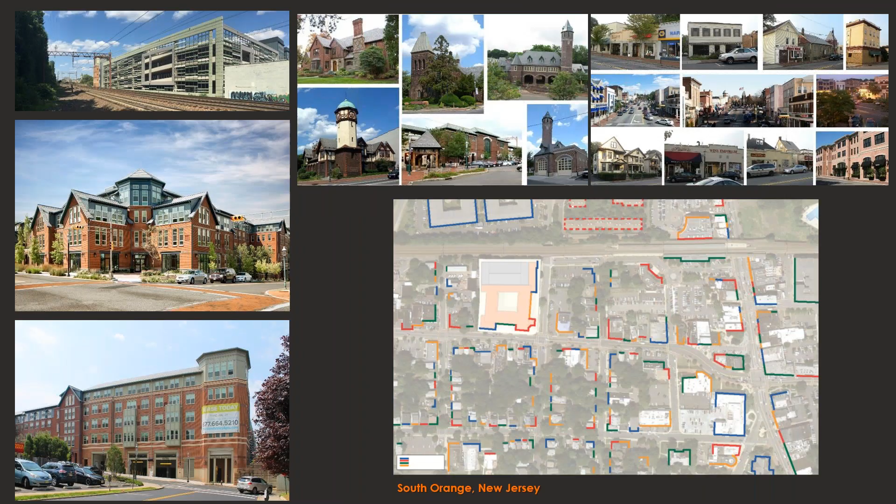When we do our design projects, particularly in existing communities, and definitely ones related to transit, we often take a moment and try to map out those increments on the plan of the community. The diagram in the lower right is a graphic map overlaid on a satellite photo of the facade increments—the sizes and scales of buildings as they're expressed as uniform architecture. So some are larger and some are smaller.

As we were looking at incorporating our project, which was generally much larger than the predominant scale of the increment, we saw that in order to get it to fit better into the community, we wanted to create scaling devices and facade identities that were smaller. The image in the middle reflects that approach, related to smaller identities across the street. Then as it segued down the hill towards the train station, it moved towards a larger building identity that related to some of the larger identities you can see in the upper right.

The civic buildings are in the middle of the page, and the upper right shows the private sector identities. We looked at the character of the community—what the size, shape, and predominant form and mass is—and then how our project could relate to that.

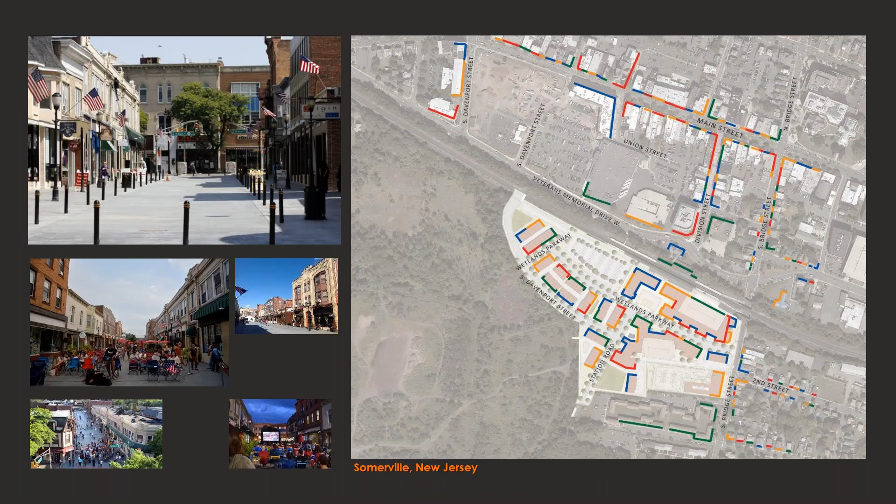Another New Jersey community we're working in right now is Somerville. Again, when we look at this project, which is replacing an old rail yard and town dump on the other side of the tracks from their existing main street—which has a lot of charm and character, as you can see in the images on the left—we looked at the height, scale, and general run of facades as they march along the streets we would be connecting to with our project.

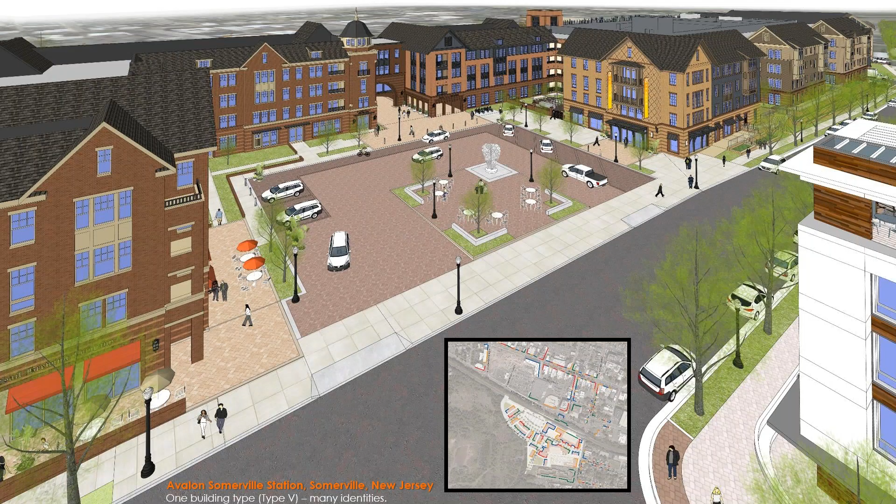Also, because this particular project had so much that it was defining on its own, we thought about coming up with an architecture appropriate to relate both to the character of their community, but also to historic trends with transit-oriented development, and nods to architectural experiences that have happened since the predominant building types and styles in Somerville were made.

So this is the place that we arrived at, currently being bid. There's the transit plaza, the drop-off plaza with some retail, the meeting hall for the jurisdiction, and lobbies for the residential components. There's a modern identity off on the far right, but generally they're more traditional transit lifestyle-oriented facades, which was part of what this jurisdiction was looking for when they were approving the project.

But again, you can see the scale, you can see the increment that we've kept up. This is one step up, a little bit larger than the increment on the other side of the tracks on Main Street, but it is scaled to itself, and it does segue to the identities along Bridge Street here and other parts of the community as it moves down the street.

Brian, before you move on to the next slide, could you go back? Sure. I normally don't interrupt with questions until the end, but there are 7 or 8 folks that want to know what the color coding means in the black box, what all of that represents.

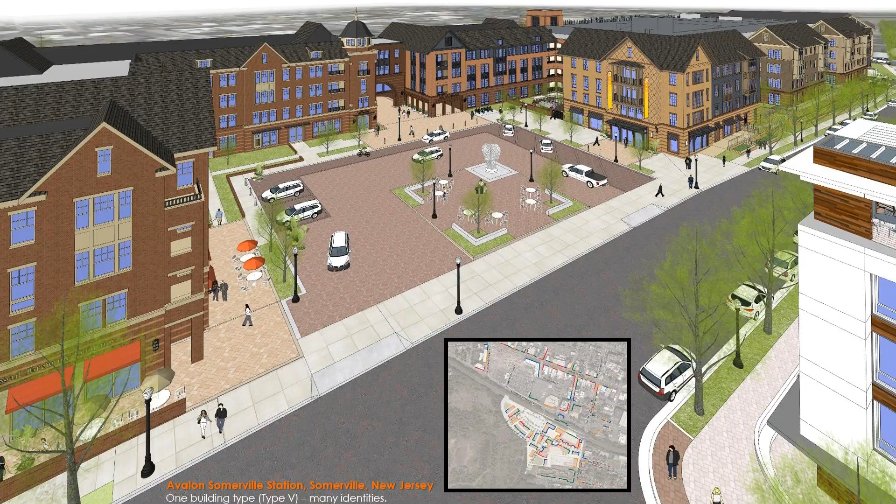Thank you. Sure. So that was a good moment to have a question, because now I want to talk a little bit about what is community in a post-COVID-19 world.

And as part of our worldview, we do a lot of mixed use projects with intensive retail. I'm going to show a few examples now, particularly from our work with Steiner Associates, Yaromir Steiner. He, long before we got to where we are now, started talking about retail as two different models of retail in the US.

There are retail places that are need-based—the supermarket, Costco, Walmart, those kinds of places you go that are commodity oriented. You typically are shopping by carts. And then there are places that are want based. They're slower, they're pedestrian oriented, they're about engaging, and you walk around, and part of the experience is surprise and what's new and what's out there, and exploration and discovery. One is about getting your needs met right away and getting in and out. The other is about being part of a community and lingering.

And for the needs-based model retail, I think the change that was already happening has been accelerated in the COVID world. We've all learned how to use Instacart and get Amazon deliveries and get food brought to our homes, and I don't think that's going to change. I think, in fact, many I've talked to are going to have a Costco experience, but through Instacart.

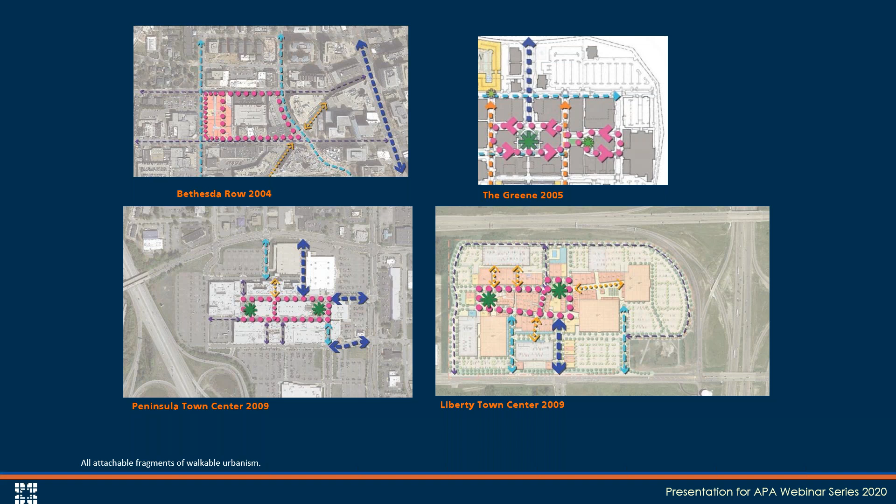destinations along a generally contained place. The figure 8 is a diagram that's used a lot, but it's not always the case—it's an example in these four here. The idea with these kinds of retail centers is that they do attach outward and extend, allowing for growth and augmentation as time moves forward.

This comes from looking at charming historic communities, and in the case of this project, just outside of Dayton, it really had to do with looking at what is appropriate, comfortable, and relevant for folks in this area. One thing we do often, particularly when doing historical research, is looking at the

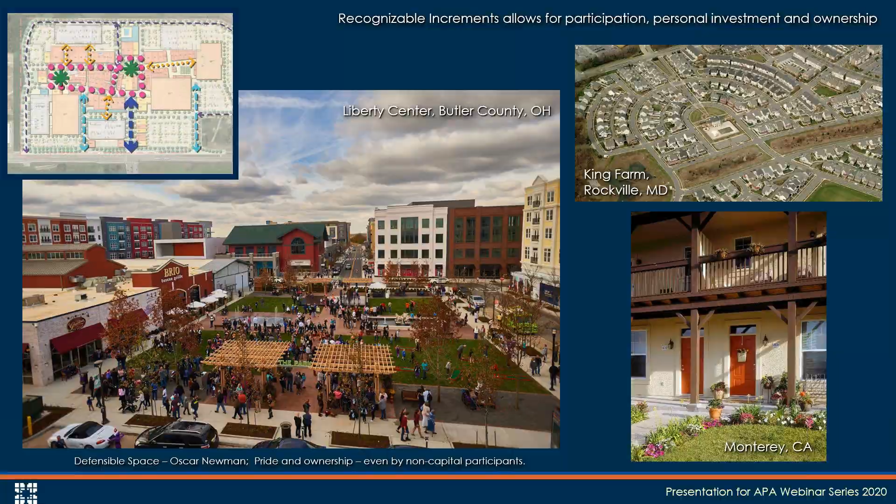Part of the book was, while there's lots of great aspects to those neighborhoods we showed at the beginning, we focused on what increments made a great walkable neighborhood—what you can add to that attachable fragment to make a neighborhood better and better. What can you grow? What do you grow with? We broke the book down into seven or eight categories of products. They're not all buildings, so I can't call them building types, because there are things in there that aren't buildings.

But we started with private sector buildings, and then we were asked by a publisher to add the public buildings. And then what turned out to be the most controversial, we added mobility types to the book as well. I'll talk about that in a little bit.

But all of these types are what make a great walkable environment work, and they all have influence on one another. Imagine a chessboard and the way the queen and the pawn and the knight influence how all the others are located. That's how we're looking at how each of these buildings have an inflection on the greater whole.

Buildings, which are really private sector driven, have an inflection onto the greater whole. And so part of what we did was talk about building type in terms of the community level, and therefore we talk about the term of increment for that.

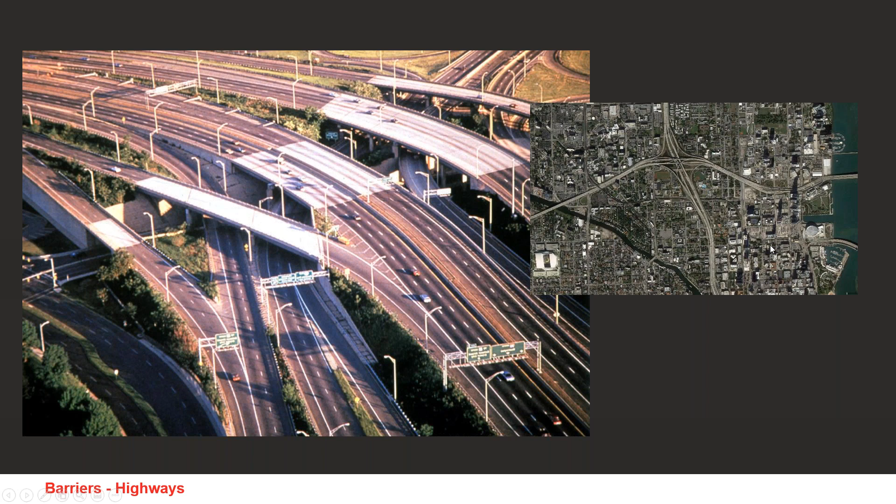So let's talk a little bit about what's a barrier to community. Obviously, highways and rail lines even will stop a great community from growing and one neighborhood from extending. It's an obvious barrier. This is a notorious example from Miami on the right with I-95.

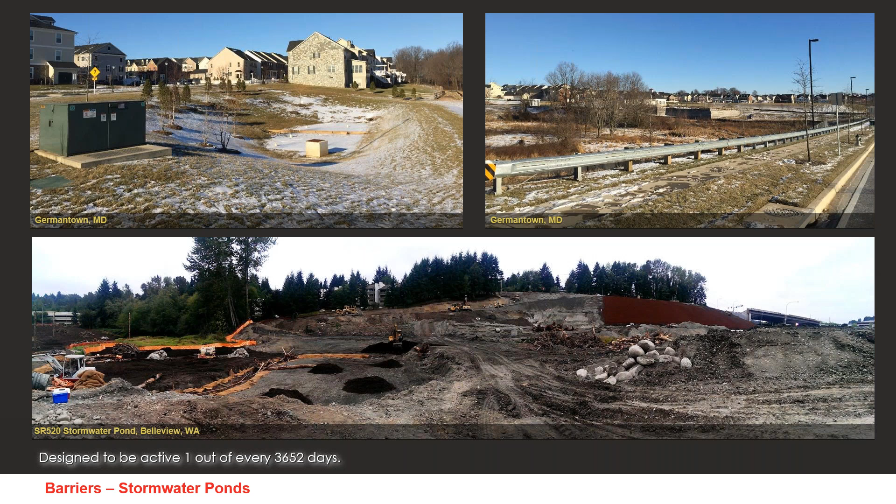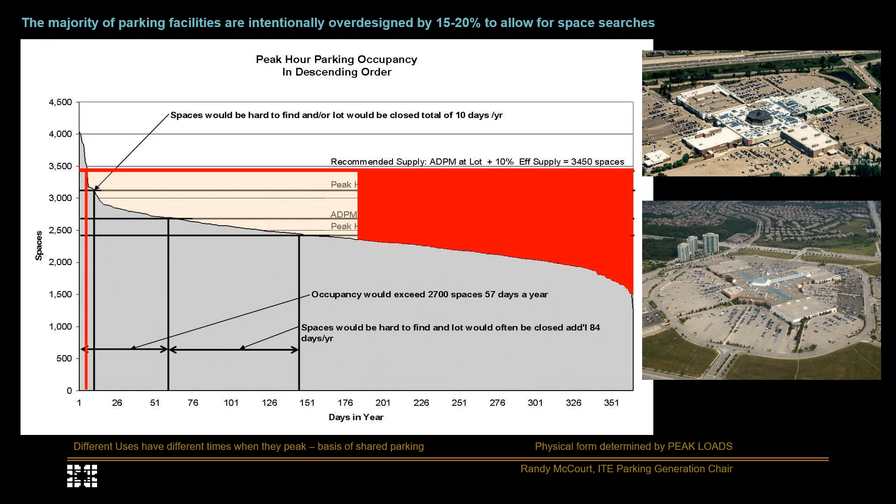Similarly, parking is a storage use. In the building code, it's very clearly called out as a storage use. And like stormwater, it's designed for peak usage at one part of the year. So regional shopping malls are designed using numbers in the codes from the second Saturday before Christmas or the Saturday after Thanksgiving. Those numbers are used to design the overall facility with 15% overage - you take what they think occupancy is going to be and add 15% so people can circulate. So you're automatically starting with 15% empty. But when you go to June or July, that parking lot is 45% to 50% empty by design. That's how they're made - we're designing the emptiness into the project through the engineering of it.

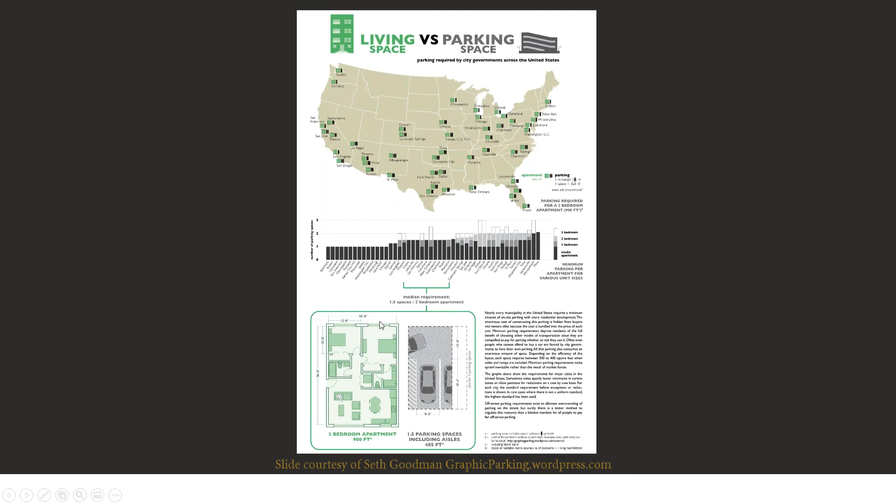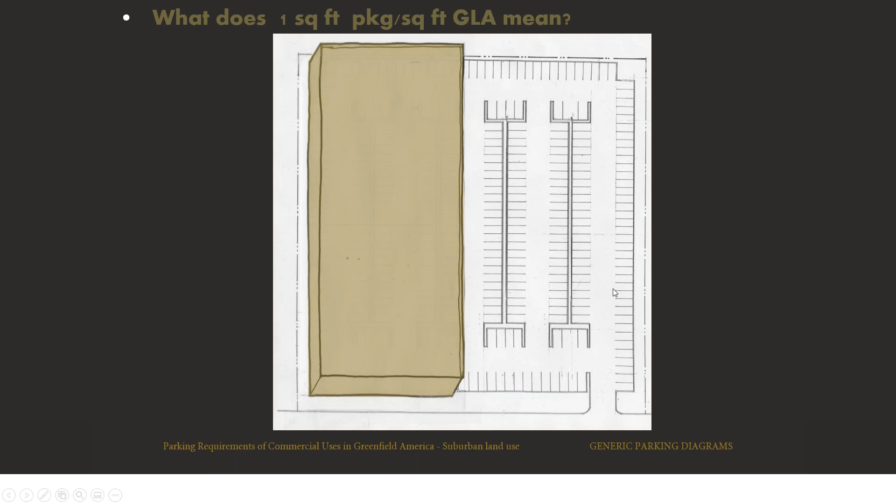So what does that mean? That means if you're doing a 1-story building, half your land has to be 1-story commercial building, half your land has to be parking. If you're doing a 2-story building, more of your land has to be parking. If you do a 4-story building, the majority of your land has to be parking by law, by rule, right? And so that's why the suburbs look like they do, no surprise.

This is like putting stuff from your closets in your living room. And when you do that, you're called a hoarder. And that's what our planning does. You're effectively taking storage and putting it in your front. And this has other negative consequences.

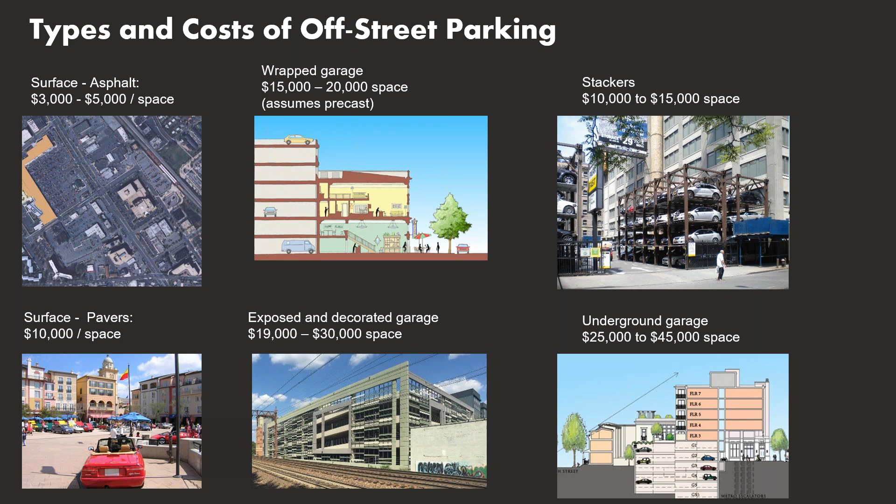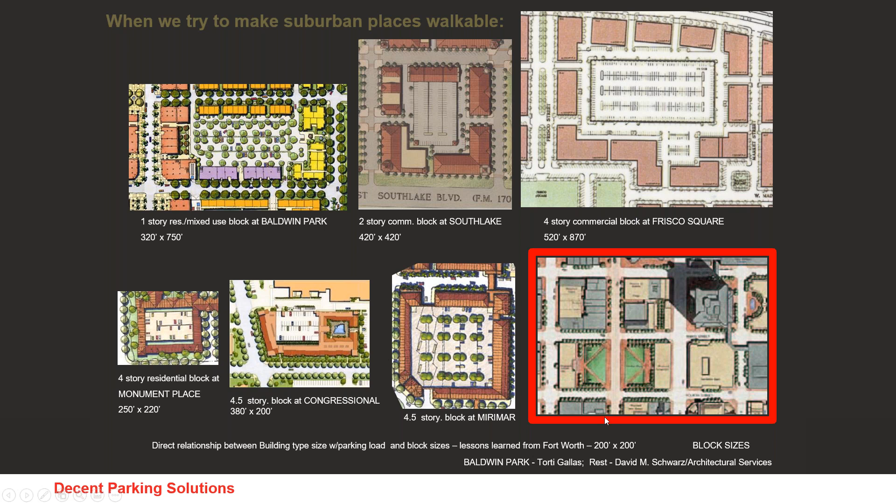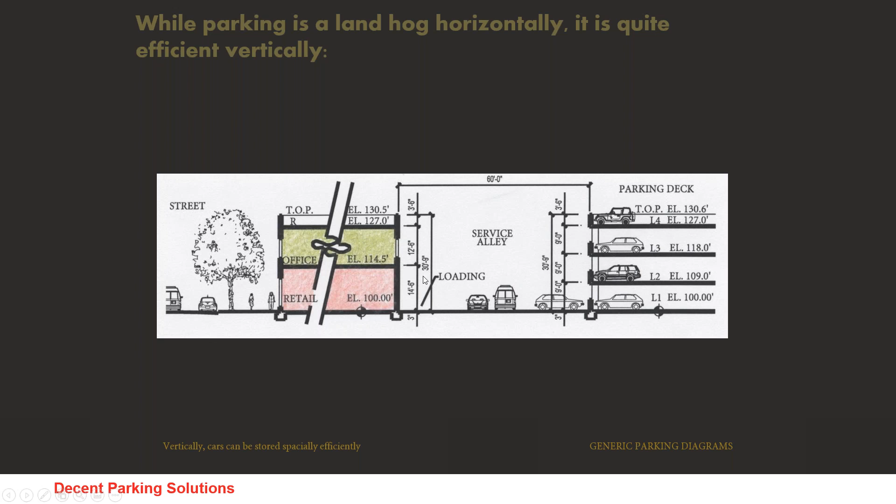So parking is inefficient horizontally, but it is more efficient vertically. This is a diagram from Southlake that shows that in the same height of a 2-story commercial building, you can get 4 levels of parking, and that's how those blocks work.

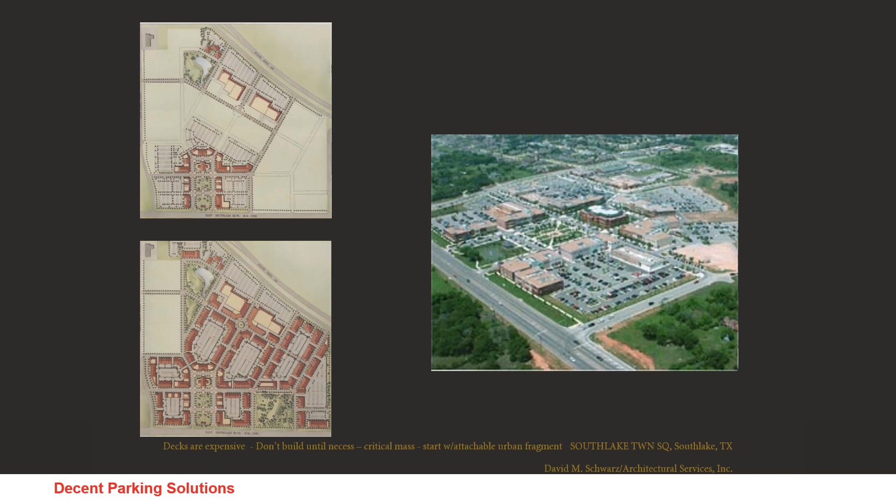Parking standards - one more quick couple comments on parking standards. And housing in particular: the cost of a bath in a unit of multifamily is somewhere around $7,000. The cost of a kitchen is anywhere from $12,000 to $17,000 to get that built and installed - you can probably get it built cheaper, right? So those are typically the most expensive parts of a unit outside of the drywall and the wood studs.

In some jurisdictions you work in, they require 2 spaces, and sometimes that has to be underground. So you're requiring $50,000 to $110,000 worth of parking to support a unit where you could theoretically build it for a lot less - it doubles the cost of the housing because of something not intrinsic to the unit itself, but the mobility solution that's been privatized and added to that unit.

And so privatized parking also has a double whammy on the private sector, in that it hurts the yield of the land.

This is 3 building examples, all Type 5A maxed out buildings - meaning they're maxed out 4-story tall wood buildings on their site. When you max out that and you're surface parked, you can only get 30 units an acre.

When you max out a Type 5 building and you've got a parking deck in it, in a wrap, you can get 55 units an acre. When you max it out and you're transit served with bikes and other mobility solutions, you can get up to 80 units an acre yield on that with that type.

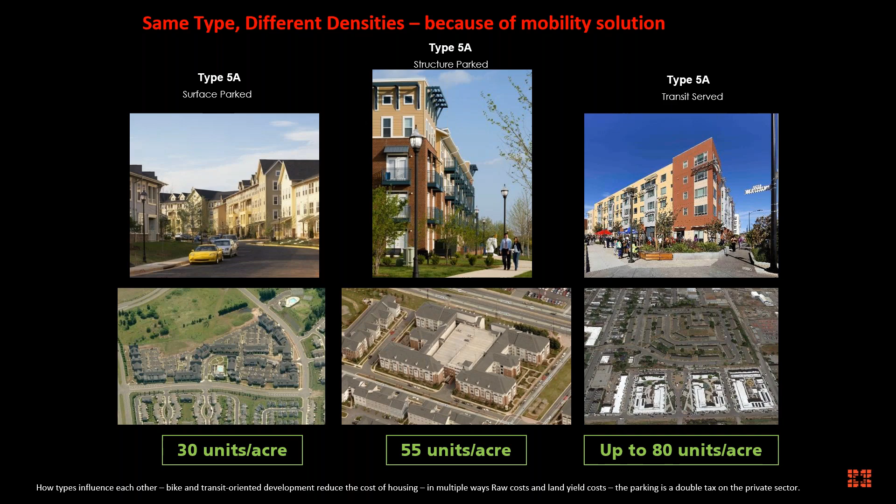So the privatization of mobility impacts both the cost of the unit per unit, because you've got to build that mobility solution, but it also impacts how much yield the land can get at a particular building type. All right, so we'll go to building types now.

These are lower scale single family types that all create community. There's the basics like side stairs and center stair colonials and Cape Cods, but there are also some interesting types developed in more walkable places, like the Coach House, which has tuck under parking, Katrina cottages and such. Most of these types, which we're trying to make great frontages, often have their alley service on the rear, as the middle image shows.

Townhouse types are interesting in that there's a lot of variety that isn't necessarily understood by the planning community. The difference between a 16-foot townhouse and a 20 and 25-foot townhouse is huge from the perspective of the person who's living in it and the developer.

Even the difference between an 18 and 20 is there's a lot that can be achieved in a 20 that can't be done in an 18. For example, in a 20, you can put 2 bedrooms side by side on a typical floor, which is not feasible in an 18-foot unit. In an 18-foot unit, you can park 2 cars side by side in the back, which you cannot do in a 16-foot unit.

In a 16-foot unit, you can park 1 car in back and 1 car in front parallel, which is not really doable with a 14-foot unit. So these are all things, and then you can go up the spectrum and there's more capabilities. Typically, you can start to wrap a stair in a wider unit like a 25 as you go up.

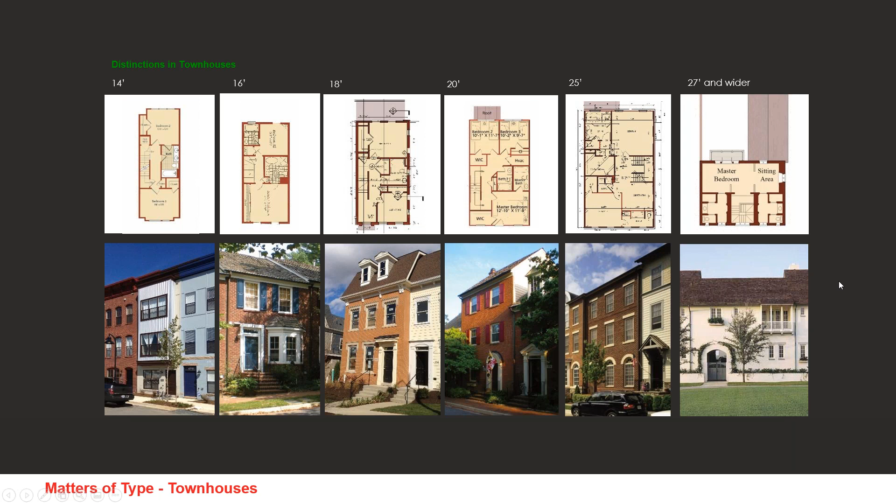There are other interesting kinds of attached housing. This is an example from Adelaide and a project called Lightsview that's very interesting. These are single-story row houses. Typically this isn't done because of land costs, developers want to get more out of their land, so they'll build multi-stories to get more stuff and develop more. But in this case, the developer devised this type and it was successful.

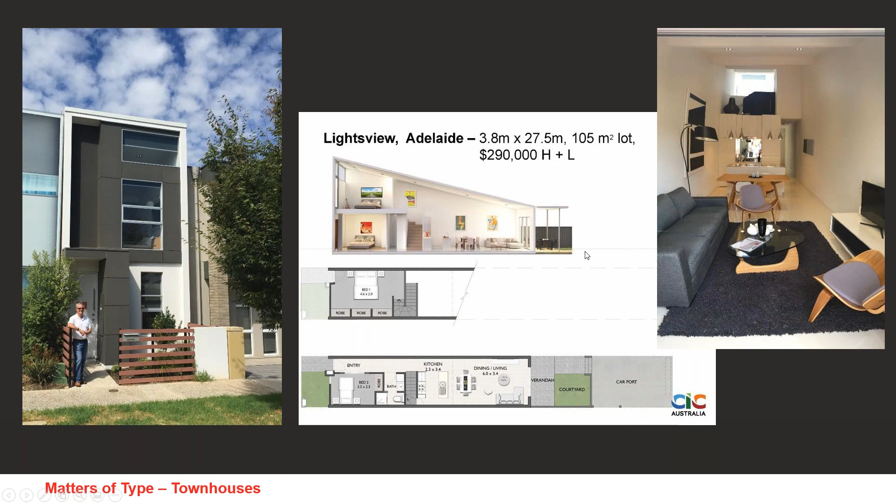They also, at the same project, devised these really interesting 12-foot wide units that had a very distinct market for recent divorcees with kids, where there was a den room in the lower level that could double as a bedroom when the kid visits, but there's a main bedroom above and then a sitting area behind, and these were very successful units for them.

There are other kinds of units that others have called missing middle. I'll breeze through these, but these next couple are self-parking types. That is, they're like townhouses in that there's multiple units, but they all park themselves, so you don't have to worry about finding parking for them.

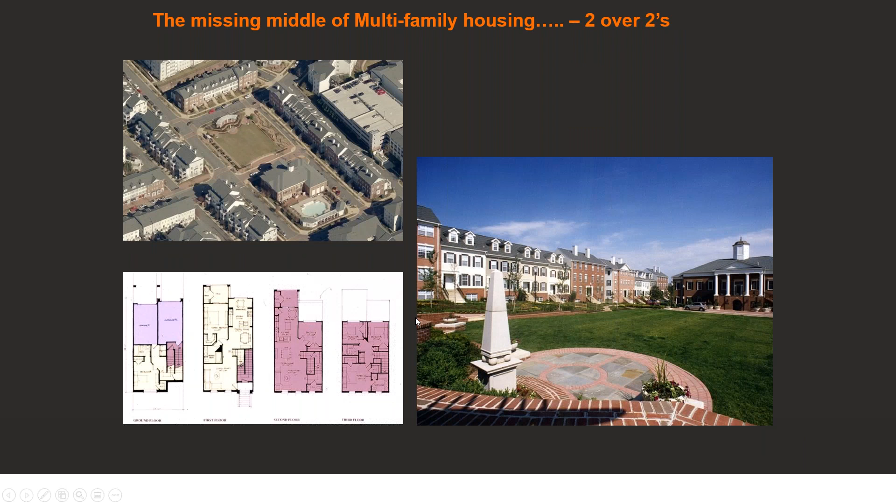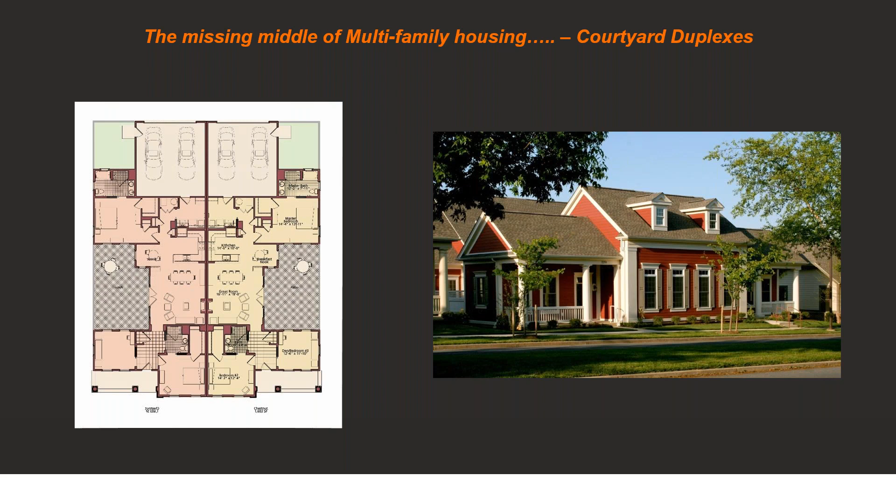This is one that Torti Gallas devised called Charlestons. These are 2/2s. There's a parking space for each unit. There's 2 stacked townhouses on top of each other. English basements are similar to those. These are corner manor house units. These are duplexes that are attached, courtyard duplexes, typically great senior product. These are the English basements with a unit on the ground floor.

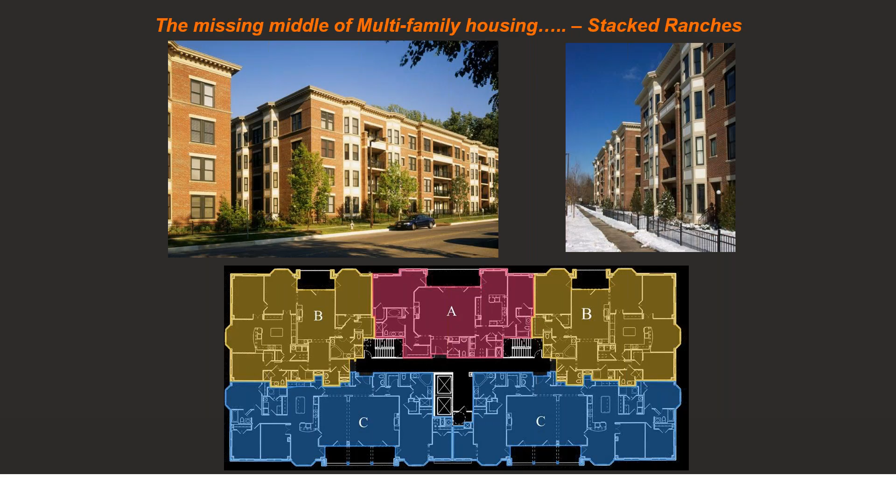Other interesting types are stacked ranches. These are elevator-served buildings, but the units are huge and are great for downsizers. So if someone's moving from a big house and they're buying a house in the south and they want to still have a house in the northeast, this is a type that's been built. This is the inside of one of these units.

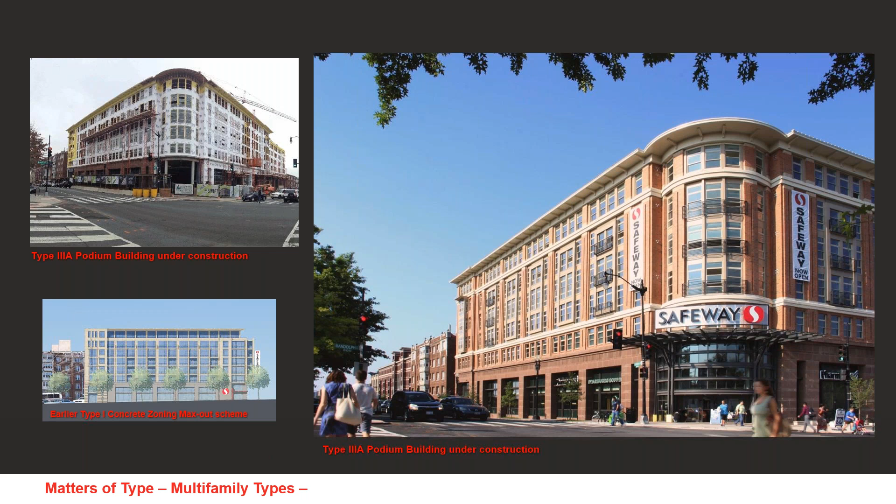We chose as a team not to go for that extra level of development, because if you built that one extra level, as shown in the design on the lower left, that would have required all the units in the building to be built to that higher level of construction costs. So you would have gone from a construction cost around $150 a foot for every unit to $250 a foot for every unit. It's better for the pro forma just to leave this down a story and build it all out of wood.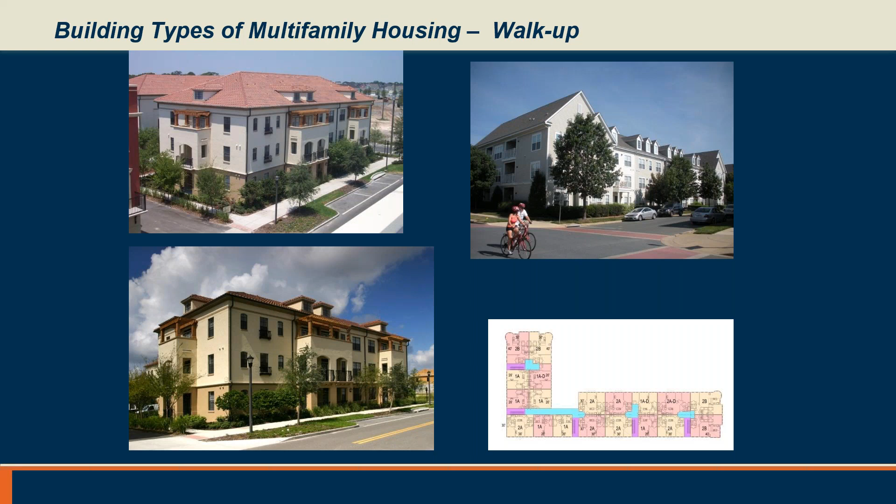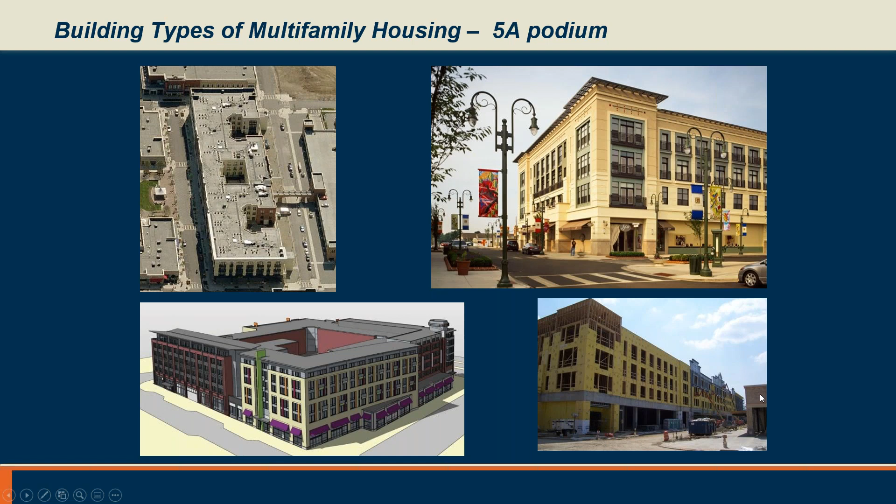For multifamily, there are a lot of different types. There's walk-up, where the ground floor has to be accessible, but you can have stairs for the rest of the units above. There are elevator-served buildings, the Texas Donuts we showed earlier, podium buildings that have the ability for either more units or retail below under a concrete podium, and then multifamily high-rise, as we talked about.

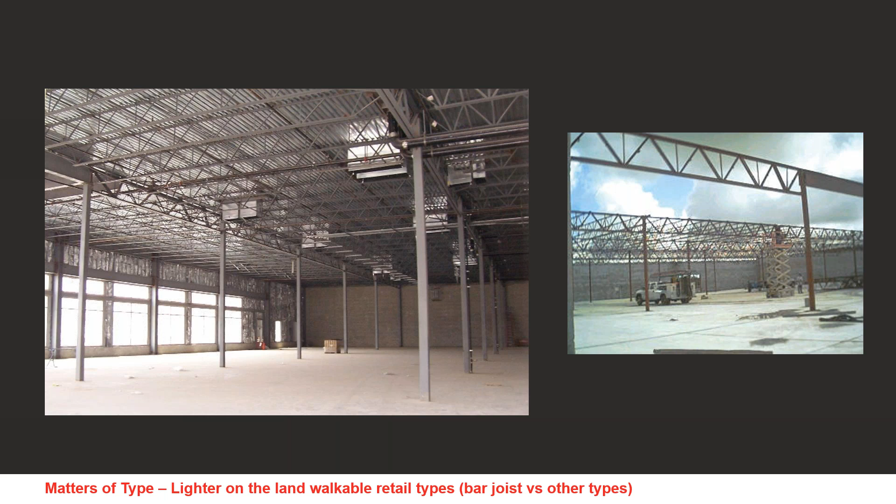When you start thinking about placemaking first, when you're devising types, you start coming up with unique types, particularly when thinking about retail places and connectivity. Conventional retail is typically built out of bar joist buildings. So when you're looking at them in construction, this is what you see: steel columns, bar joists, and a metal roof.

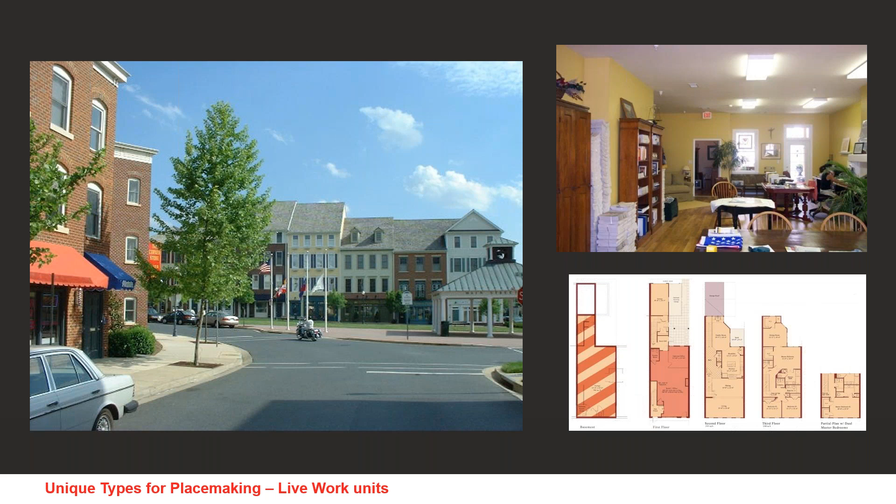Other types that have been devised under the codes are these live-work units in new urbanist projects. This is Kentlands here. There are these stacked wood units. These are a little different. The live-works are fee simple, so they're limited. These are 1,200 square feet on the ground floor, and that limits the users to retailers comfortable in 1,200 square feet. So you'll get a lot of real estate agents, hair salons, and nail salons in this type.

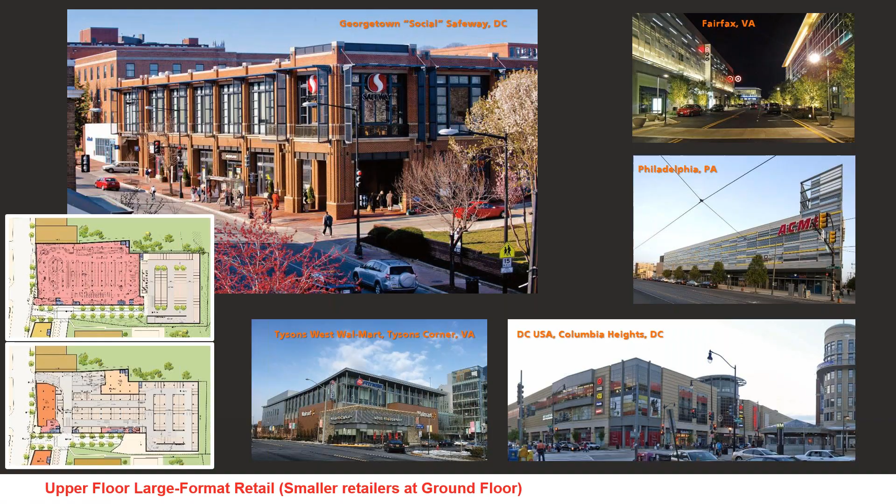Let me see how we're doing on time. We're okay. So when you start thinking typologically, you can create interesting solutions that you would not normally come to if you were thinking from a pro forma perspective automatically.

The people who live here have cars, but they don't typically use them. They walk to school, they walk back, they walk to shop, they walk to the restaurants.

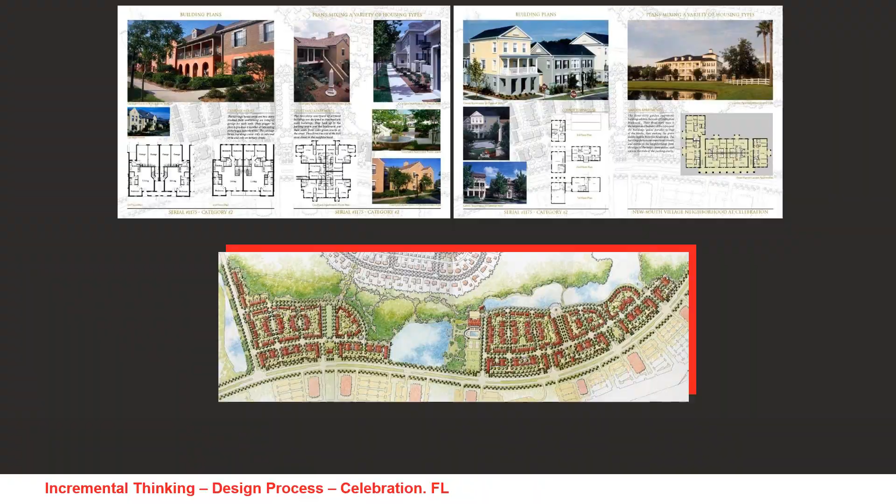They feather from one another. These are 2-story towns that feather into a stacked product at the corner, coming around to create moments that influence the architecture in the neighborhood and gesture to place.

This is another project of Torti Gallas's, at George Mason University with primarily faculty housing. Again, the majority of it is townhouses and stacked, but there are these other building types, like the one on the upper left from the book.

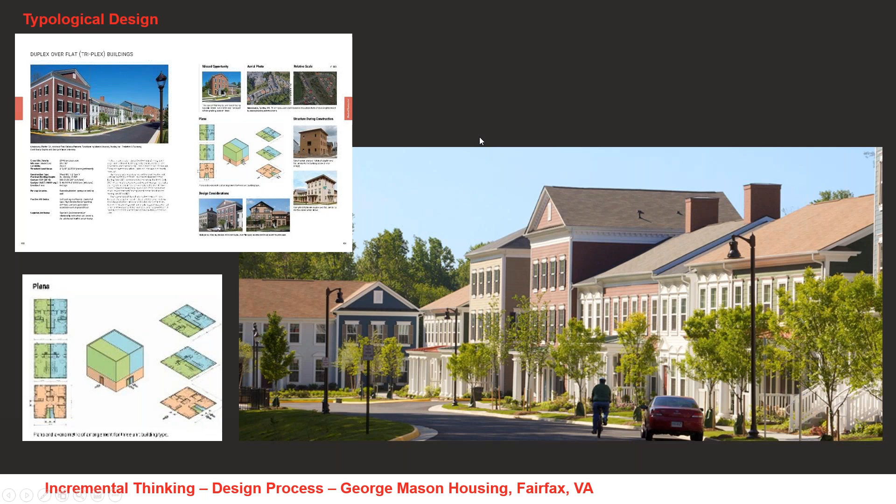There are 2-story units over one unit on the ground level. That one unit serves as an accessible unit, but the units above create a form that is a little stronger building type we can use at corners to emphasize key moments in the urban plan. We've used this product in many projects—we've done it in New Haven and other places. In New Haven, we used a more Italianate style to be appropriate for that community. So again, type and style can come together to enhance place.

And then there's just a question of quality and place. So I'm going to show a quick project here. This is the last project I'm going to show, which talks about how one can create a little more rhythm and intricacy in a place while still meeting the program, and hopefully by doing that, developing a place that has more value and more interest and desirability in the long run.

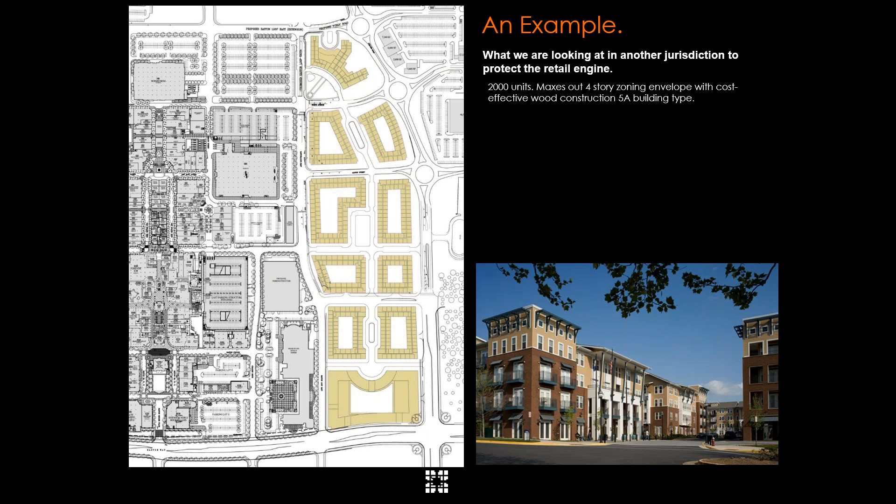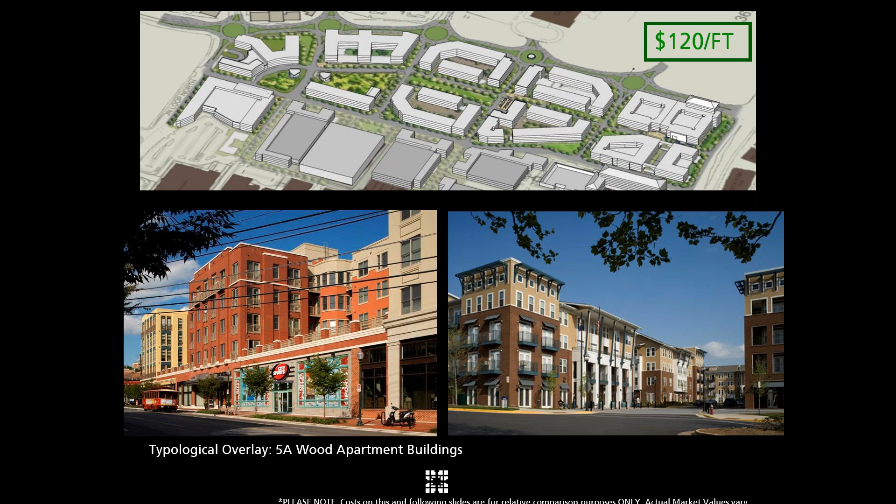So this is a site plan for 2,000 units adjacent to a lifestyle center where the program was for 2,000 units. One way to do that would have been to put type 5A, 4-story wood stick buildings across the whole site. And that's what this plan shows. We would have been able to do that, and it would have cost $120 a foot to build all those buildings. That's one way to approach this.

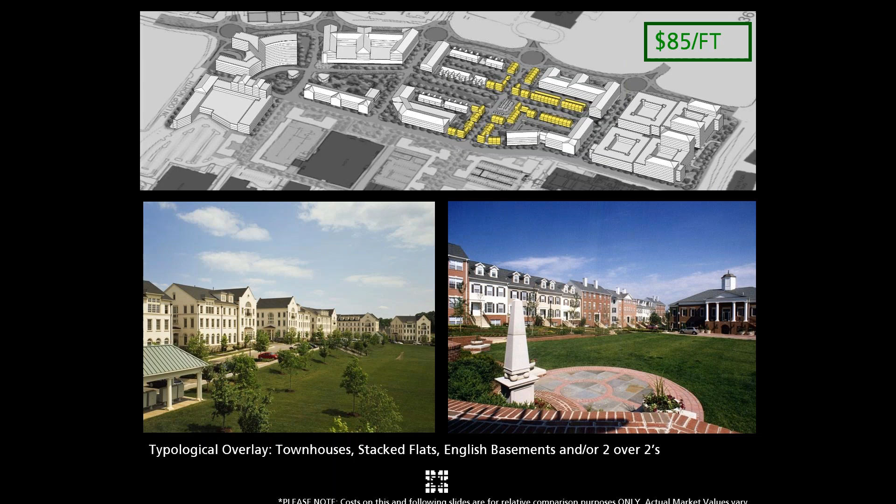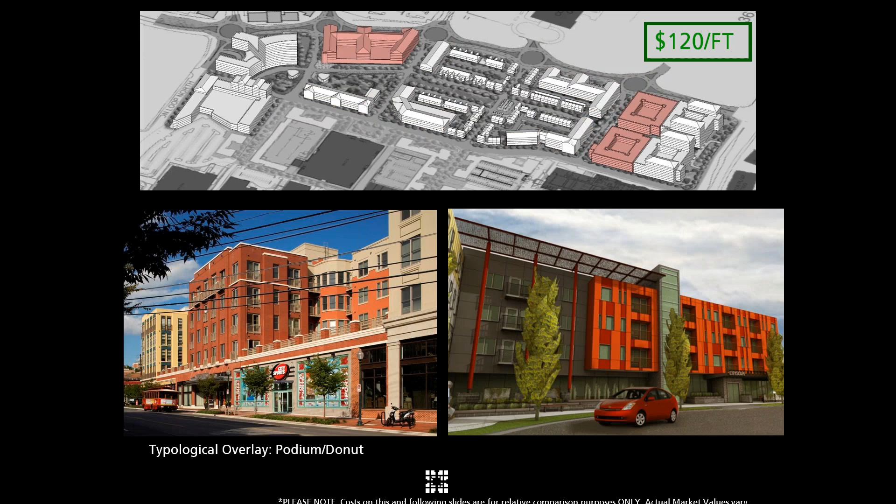Another way to approach this is to think about it a little differently, a little typologically. Starting with the place that we're trying to make in the middle, start with less intensive uses, a little 2/2s and stacked flats, and maybe some towns to create the day-one place. So you create a place that has a little more ownership, a little more typological variety that segues into these larger types, that then moves up into walk-ups and parking podiums, and then the Texas donut buildings we had to begin with, and then finally those last blocks end up being the blocks that make up the density.

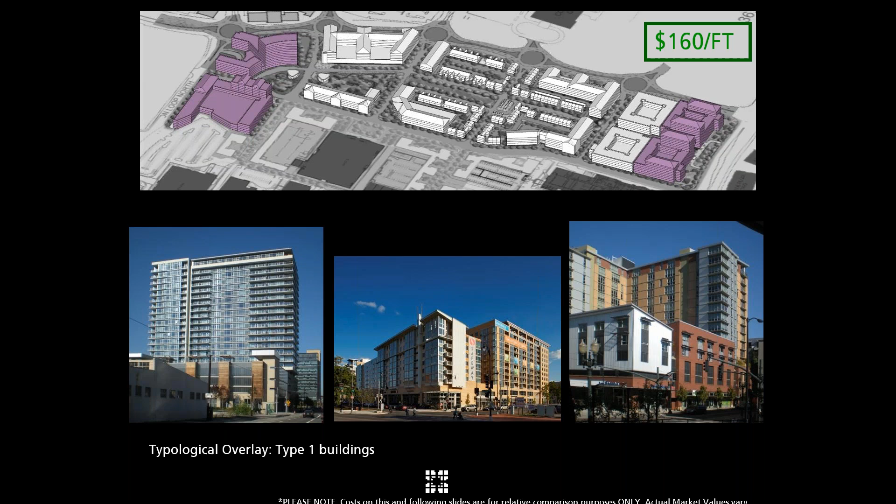So these are more expensive than the original unit buildings were, but by this time you have a place that's established and hopefully the value is there. And because these types are type 1, if by chance you wanted to build more, if there was more density, more value, you could even get more there. So what happens is you create a place day one that's hopefully more desirable.

So what you do is your construction cost in that phase one is much less, right? But the price point for sales is probably higher. Those are more desirable units, they're more value. So what you do in the end is the profit spread in that first phase is much stronger, which is safer for your development pro forma and program in the end—you're going to get more money out of that way of thinking.

And hopefully you're able to use a little bit of that money to reinforce the place with better landscaping, better placemaking, more benches and things that make that a really unique destination that again drive desire and make those long-term multifamily buildings viable. And you're still making money in the end, but then you potentially could build more and make more money.

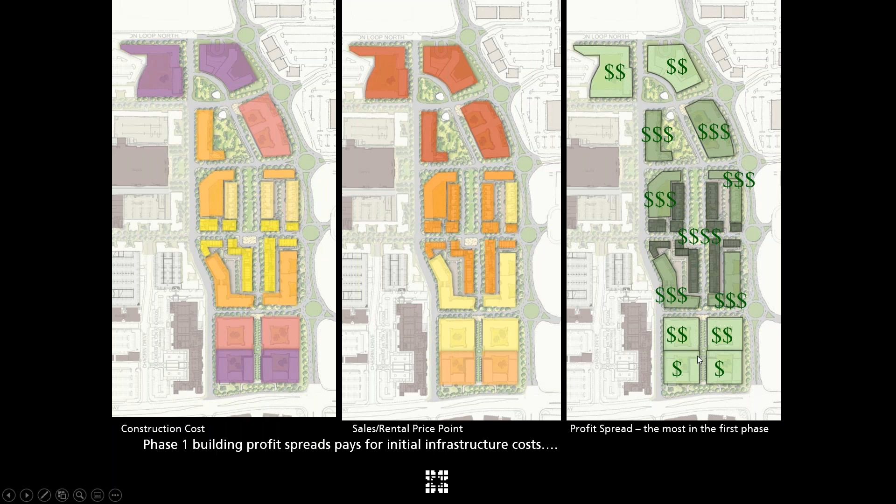And so that's the thinking that we hope others would be driven to, and that's why we put the book together. And so that's most of what I have to say today. So thank you for your time, everyone.

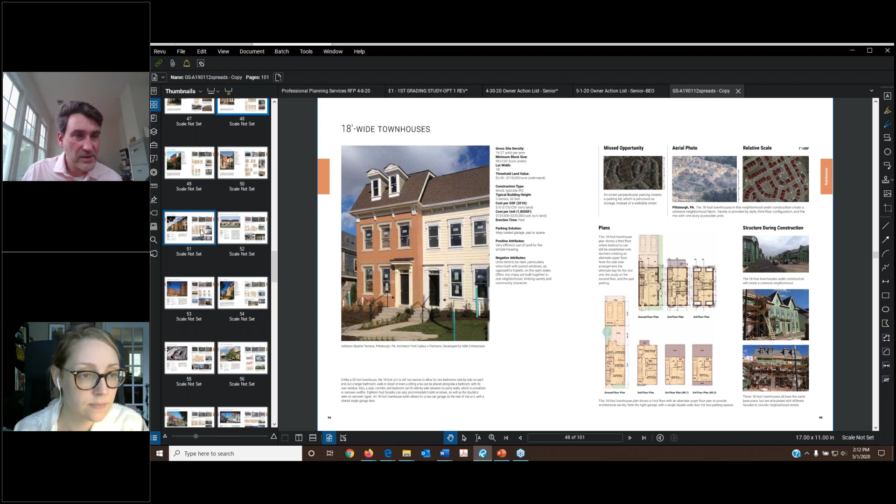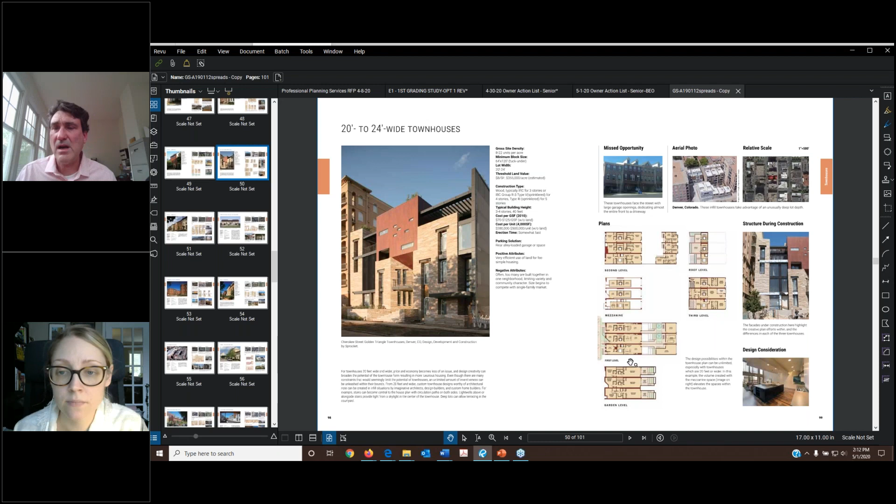If you're talking about going that way and the other depth, there are plenty of products that jump a floor - the 22 in the book does that. So this 20-foot type here in Denver, the street is a story higher than the alley at the back, and so the type has the garages in the back down a floor in this particular building type. So yeah, they exist and they're not hard to implement. You can sort of see that in the photo, how that all works with the alley being lower in the back.

Okay, thank you. Yeah, I think they were specifically looking for something from left to right. So that example there is perfect.

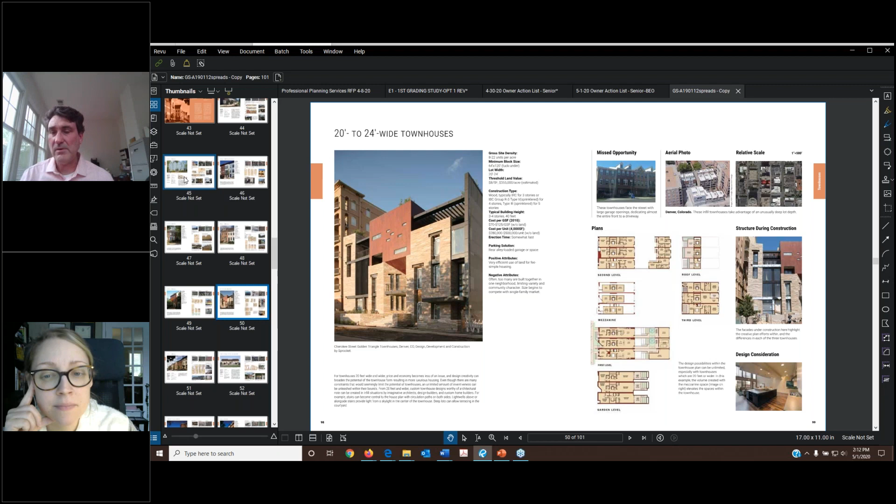Yes, and then typically the grade is not flat. So usually you'll see that, and there tends to be a lot of stepping, and it's a question how the developer or the builder is more comfortable. Sometimes they like to build, and it depends on the code. These are stepping too - you can start to see it here. But they're really just going with the grade. Sometimes they try to build them flat and then build steps up, and the last one has 5 steps and the bottom one has 0.

Again, you could have a very refined set of frontage regulations or standards provided by the private developer that talk to those issues if you preferred one methodology over another.

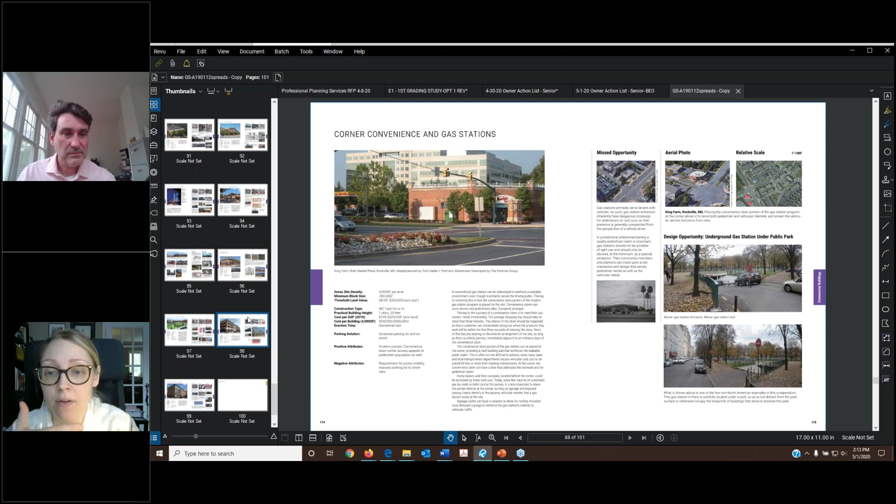Okay, and speaking of code, we'll kind of jump into some of that. Are you aware of any zoning ordinances that require ornate landscaping in front of the building frontage, regardless of the type of use?

Require landscaping, yes, require ornate—maybe they mean something really specific. I don't know of any case where I'm sure it exists, though with enough time I could come up with one. Maybe Carmel, just because it's so lush, or Nantucket, maybe. Other than those, there may be requirements—some jurisdictions in South Carolina have intensive buffering requirements, but those are more suburban. In terms of intensity, that's the only thing I can think of off the top of my head.

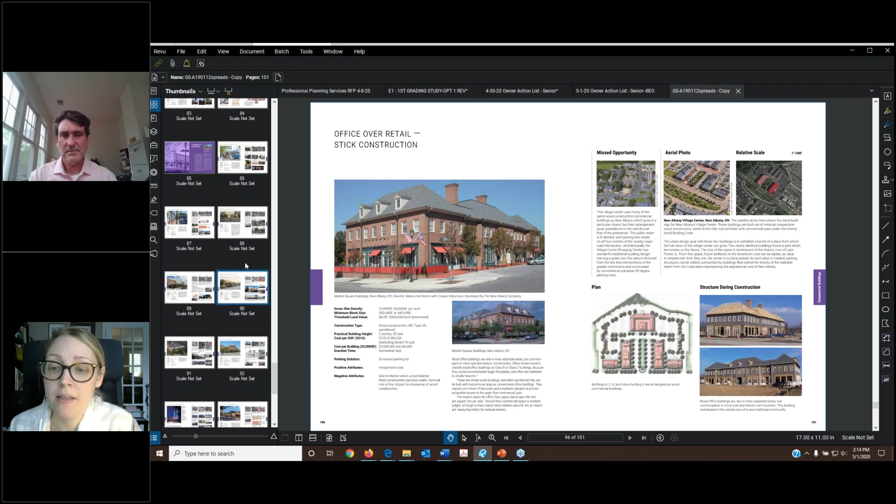Okay, that's fine, this is interesting. Can you give more detail on the conversation that allowed the structured parking to be developed as the population and the need increased? Can you speak more to that?

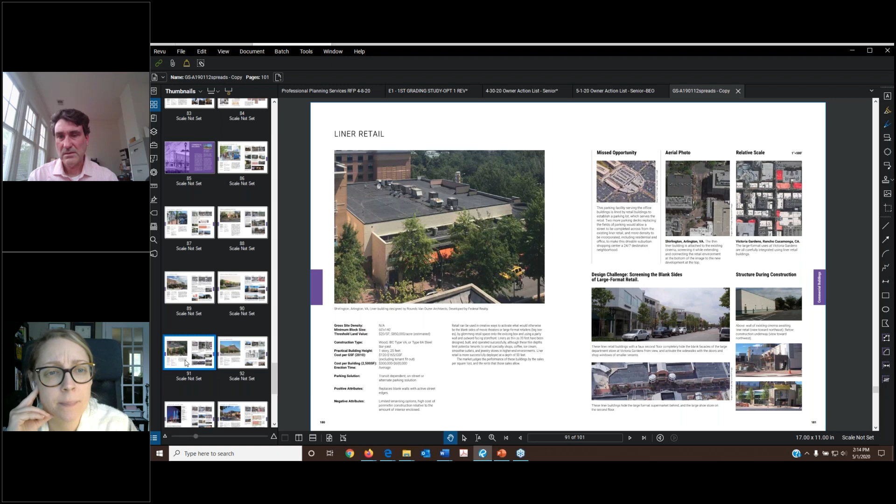Sure, so we've done—I'll go back to those plans. I wonder if this image here, there's more to it. Yeah, great, so this whole plan here, which is Frisco Square, was designed—let's see if I can draw on the screen here. Remove this. I can use this tool. It's fine.

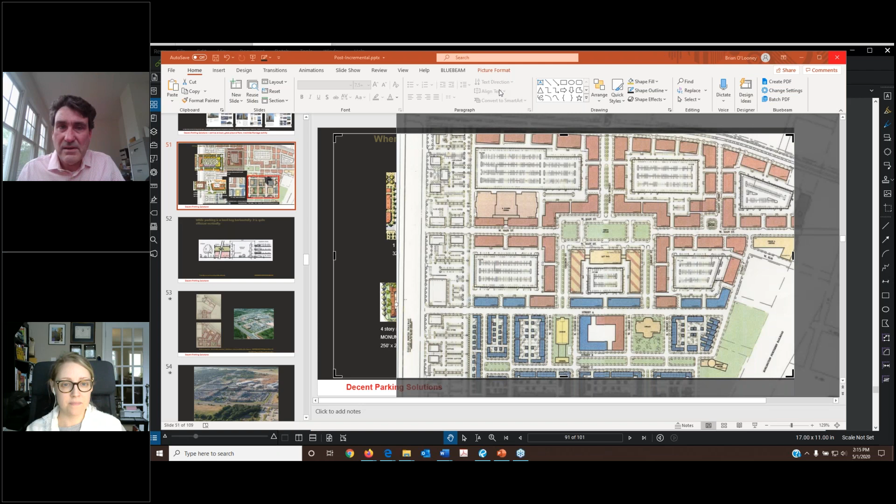So in this, I showed Southlake before. In this plan, everything I'm outlining in gray—and it wasn't built this way, unfortunately—but everything outlined in gray was designed so that, let's see if I can get another color. That was built as a—let me do it highlighter—this could all be surface parked. So the idea was you made this walkable realm day one that could all be surface parked, and then anytime, once you got to those next uses and those blocks, then structures have to get built.

In the end, they've actually built some structures up front and integrated them into buildings. So unlike this plan, which envisioned less expensive separated decks that were unsprinklered, what's being built now are attached to buildings and therefore sprinklered and a little more expensive. But this was a plan where the connective tissue was that all that commercial four-story buildings could have been built surface parked in those lands, and then those footprints that were parking lots would then have to be redeveloped as buildings, and when that happened, those decks were triggered. This was a David Schwarz plan.

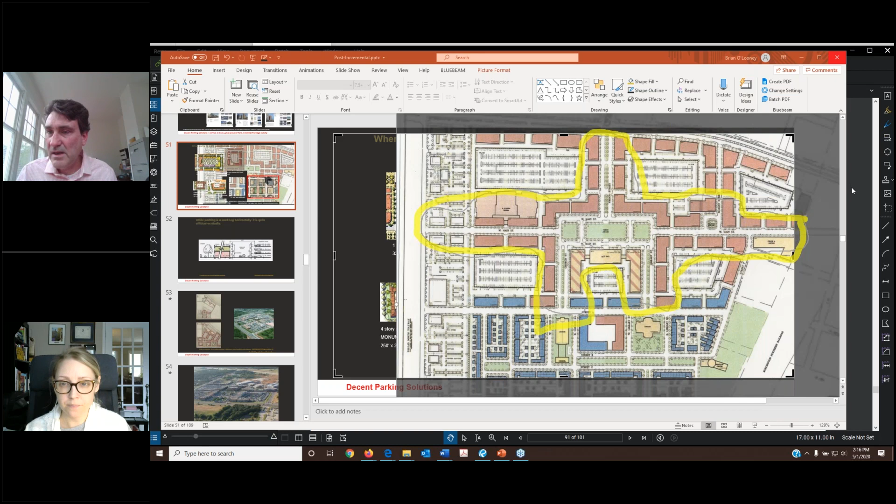How do I clear? That did it. The Southlake plan did that. Baldwin Park's plan, which we have just one graphic of—maybe I can blow that one up too. Let's see if I got that here. I do, it's really neat. So this plan, again, most of this is now built. This has a Publix supermarket in it, in the plan.

This is all intended to be surface parked, surrounded by lower density types. The last two buildings that are now built here, that just went up, are these two buildings at the water that have the first decks in Baldwin Park, and those have been—at least one of them has been built. The second one might be built now too. So that's another plan where that's been done.

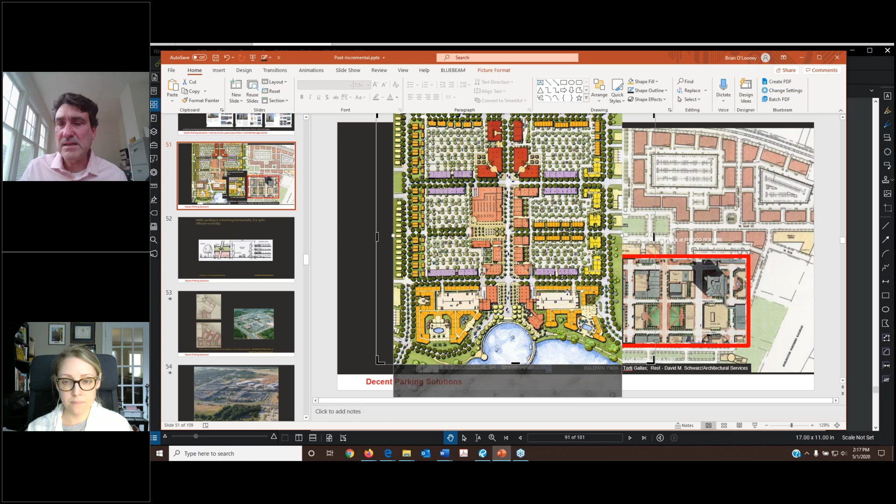And then again, Southlake, which I showed—the plan wasn't, there was an adjustment to the plan. Those folks who know Southlake, there's a modification where they created more retail, a greater retail place in the middle, but the theory still played out. It was surface parked that created the vision for the place, that sold the vision for the place, that had people buy into that thought, both retailers and homeowners, and then from that vision, once it was sold, that made the place valuable enough so that the structured parking was viable when the time came to build those garages.

Great, thank you. What is a reasonable minimum green space requirement as a percentage of the site? The question says it appears that a lot of the development presented is building with paved surfaces and little vegetated landscape areas. So again, what is a reasonable minimum requirement percentage of the site?

I have trouble with minimums because invariably they create externalities that aren't foreseen. Sometimes the green space requirements are so onerous that they end up making projects unviable because it's just too much green for what you have, and in order to build all that, there's not enough there to support the green. It really depends, in that economic equation, on what type of stuff is being built. If you're building New York City, you can build Central Park; if you're building a small residential neighborhood, it's really about how much land you're influencing. If you're preserving what exists already, that's a different equation than if you're adding new parks that you have to plant trees for, and street trees. So it's a multivariable question—there's too many variables for me to answer directly. But generally, we're not a fan of minimums and try to find more qualitative ways of describing what the goals are.